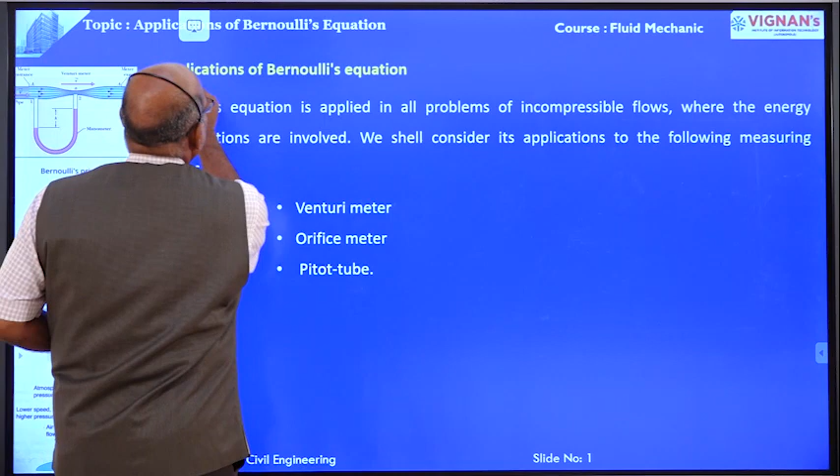Today we are going to discuss applications of Bernoulli's equation. What is Bernoulli's equation? That we have already discussed earlier. Bernoulli's equation is applied in all problems of incompressible flows where energy considerations are involved.

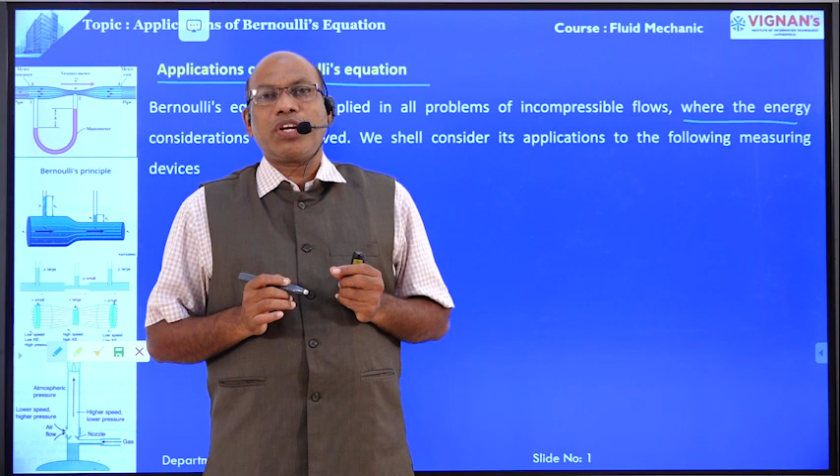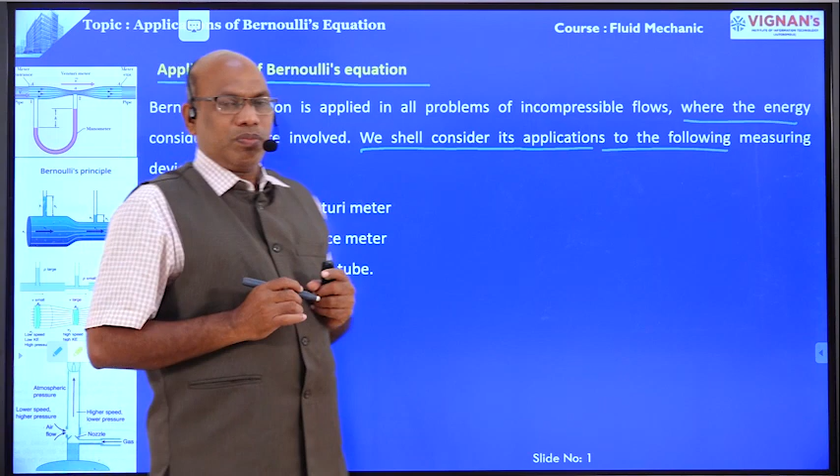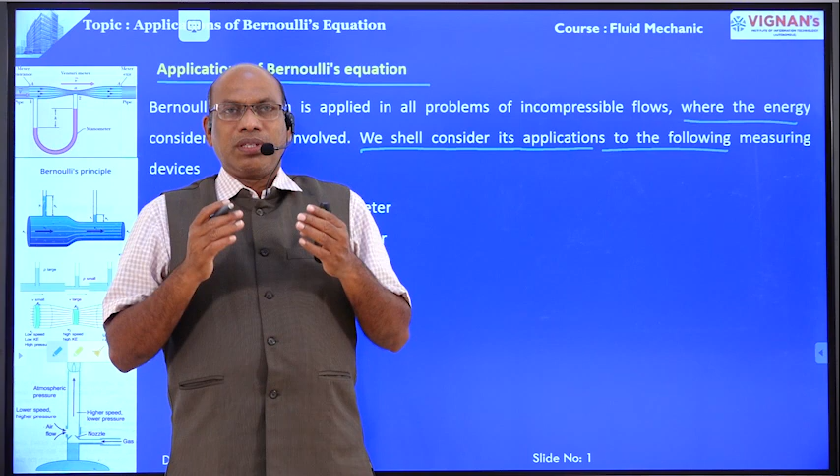Now we shall consider its applications to the following measuring devices. What are the devices? One is the venturimeter, then the orifice meter, and the pitot tube. Venturimeter is a device used to measure the flow rate in pipes. Another one is the orifice meter, which is also a device used to measure the flow rate in pipes.

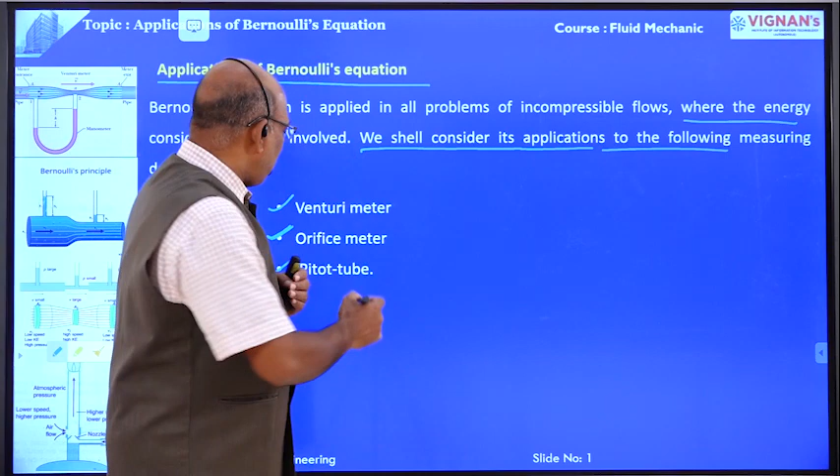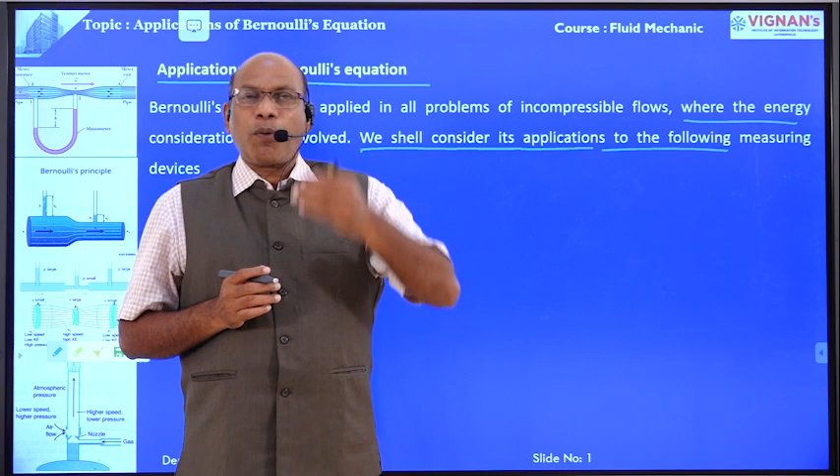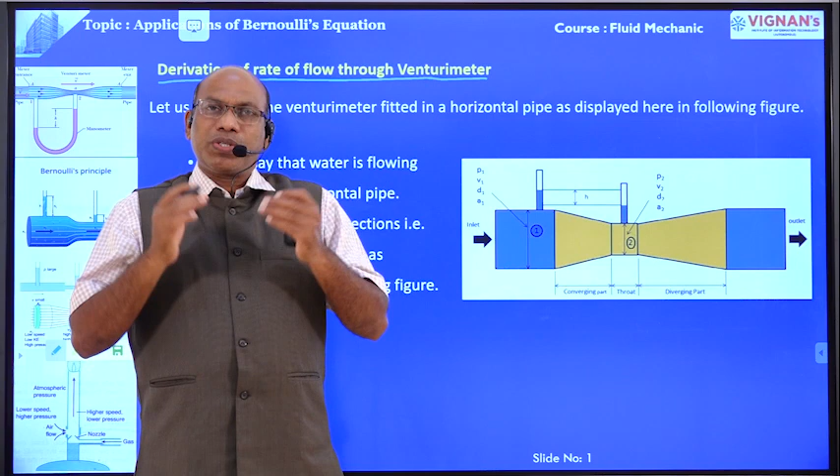That means venturimeter and orifice meter are the equipment used to measure the flow rate in pipes. And the last device is the pitot tube. Pitot tube is a device used to measure the velocity of flow at a point in channels as well as in pipes. These three devices we are going to discuss one by one. First we discuss the venturimeter, the derivation of rate of flow through a venturimeter.

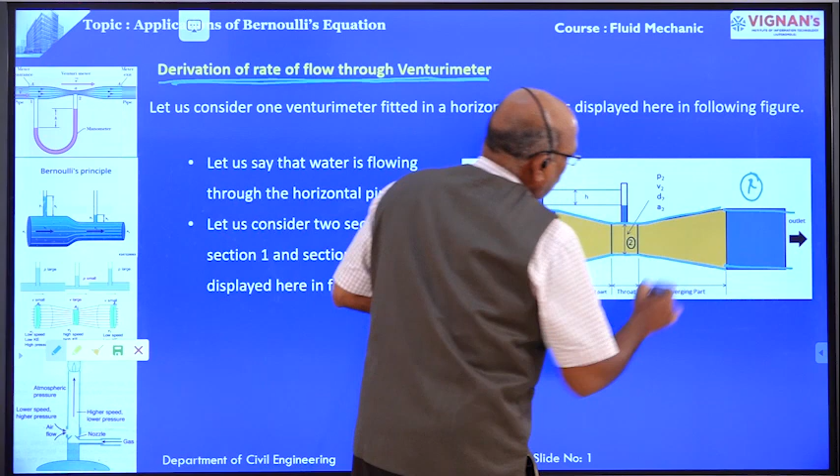Now we are going to take one diagram here. This is the pipe flow. The pipe is carrying water from left to right. Here we are going to provide one device, that is the venturimeter. The venturimeter has three components: the convergent part, the throat, and the divergent part. And water is flowing from left to right.

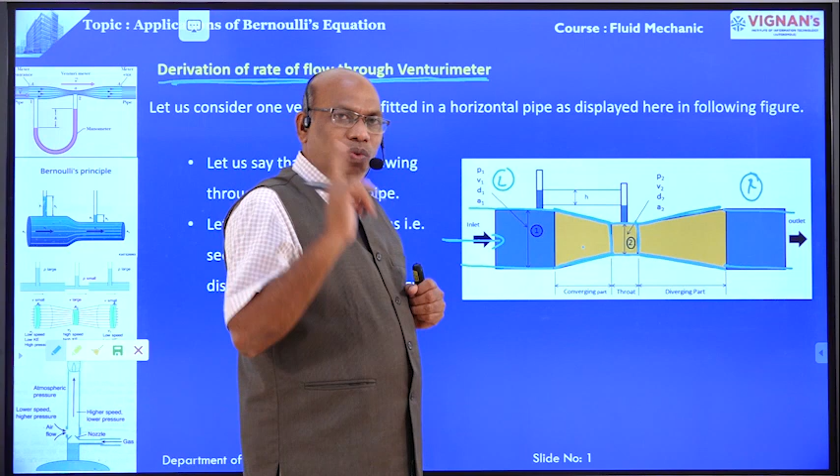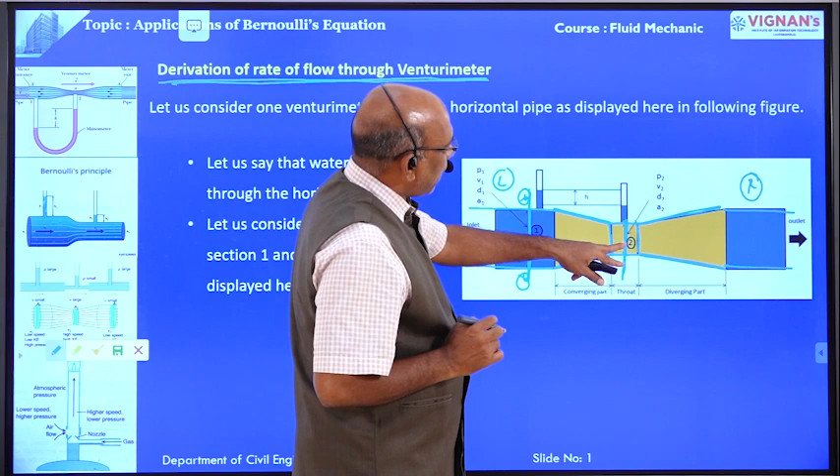In this diagram we are going to take two sections, section 1-1 and section 2-2. Section 1-1 is taken over the pipeline before the venturimeter. Section 2-2 is taken at the throat section. Now we install one piezometer in the pipe. Because of the pressure in the pipe, the liquid automatically rises up to this level. One more piezometer is installed at the throat section, and because of the pressure here, the water also rises like this.

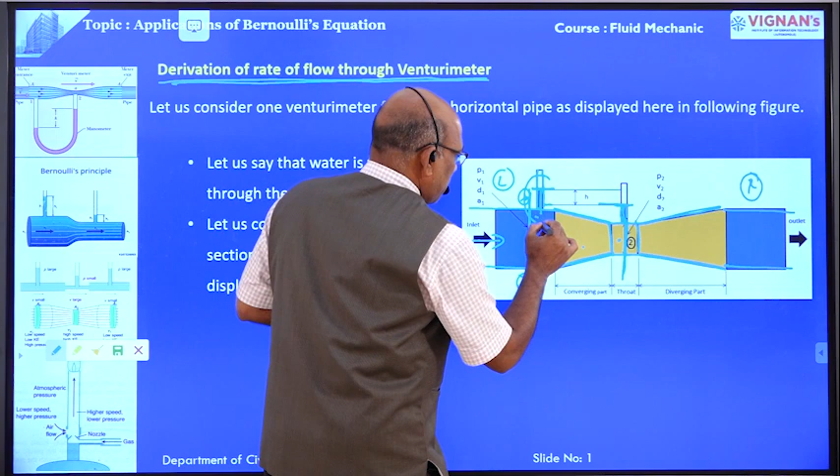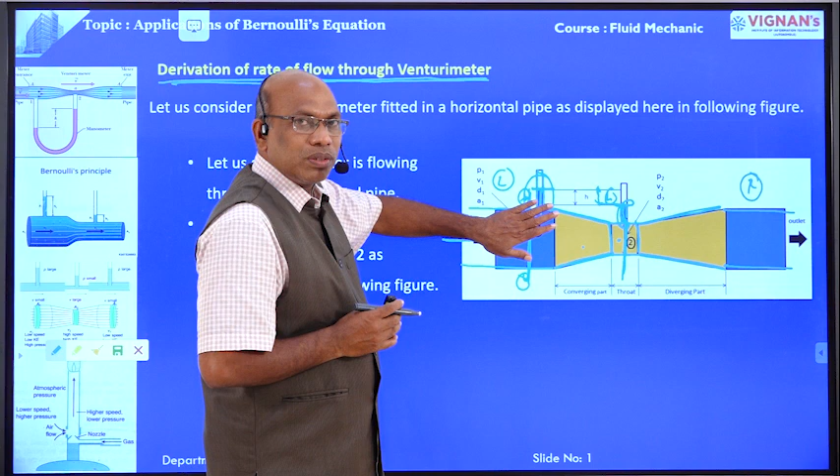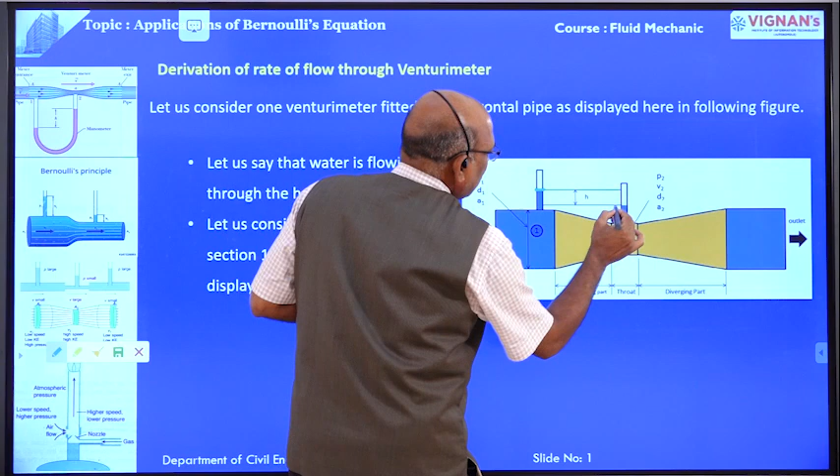There is a head level difference between the piezometer level at the pipe and the piezometer level at the throat. That head level difference is H. What is happening? In the pipe, the cross-sectional area is more compared with the throat, so the pressure head is more. Here the cross-sectional area is less, so the velocity head is more. At the pipe this is the pressure head, at the throat this is the pressure head, and the level difference between these two is H.

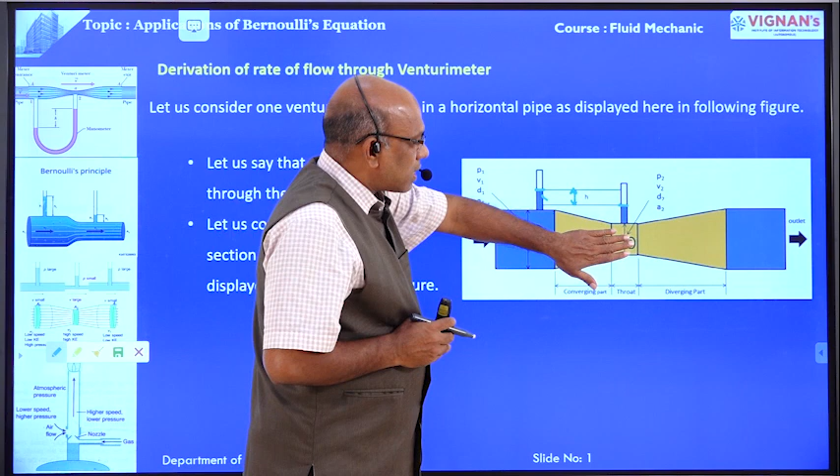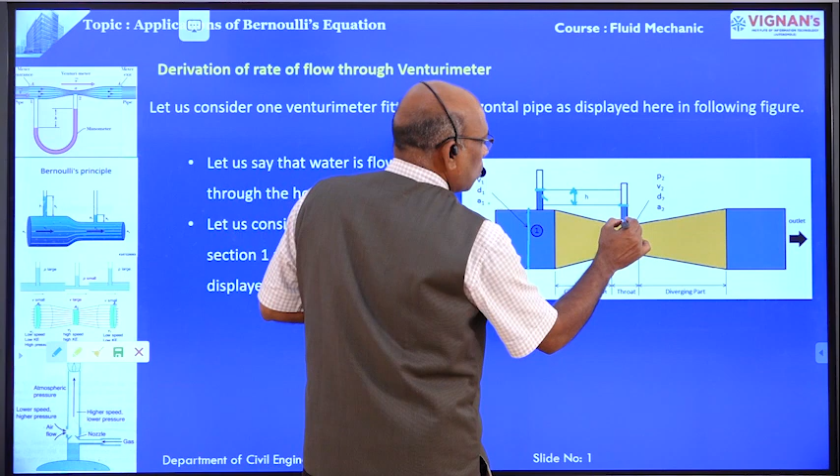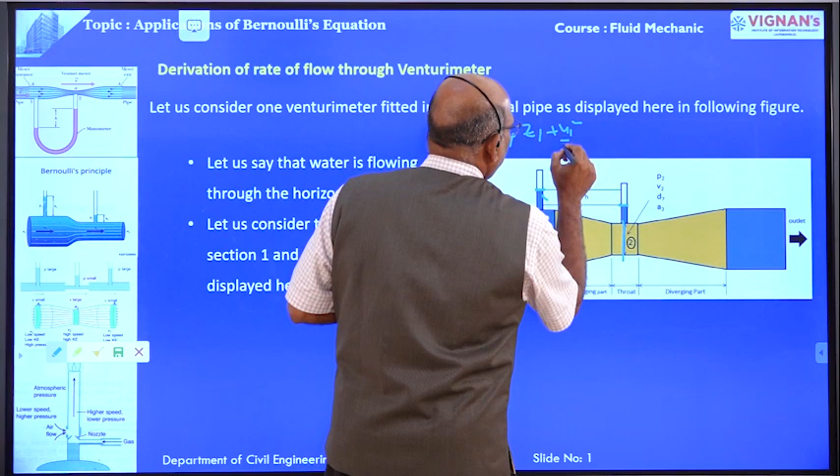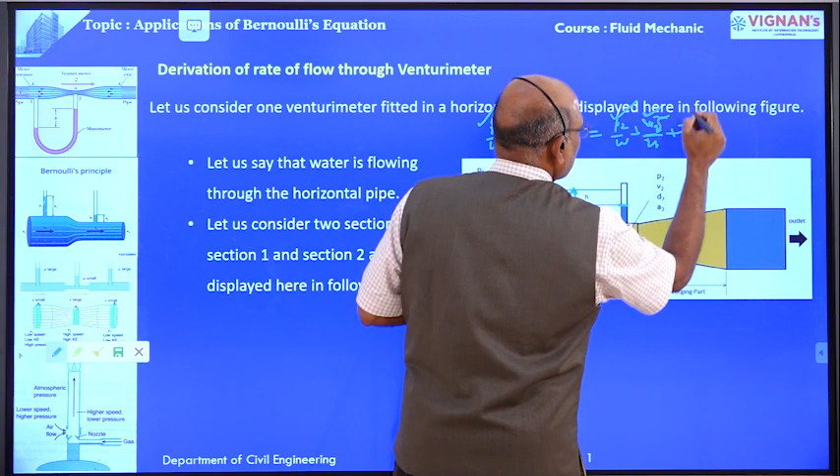Because the cross-sectional area is more, velocity is less, and automatically pressure head is more. Here the cross-sectional area is less, pressure head is less, and velocity is more. This is based on Bernoulli's equation. What is Bernoulli's equation? Pressure head plus velocity head plus datum head at section 1-1 must be equal to pressure head plus velocity head plus datum head at section 2-2. That is, P1 by W plus Z1 plus V1 square by 2g at section 1-1 is equal to P2 by W plus V2 square by 2g plus Z2 at section 2-2: pressure head, velocity head, and datum head. This is the Bernoulli equation.

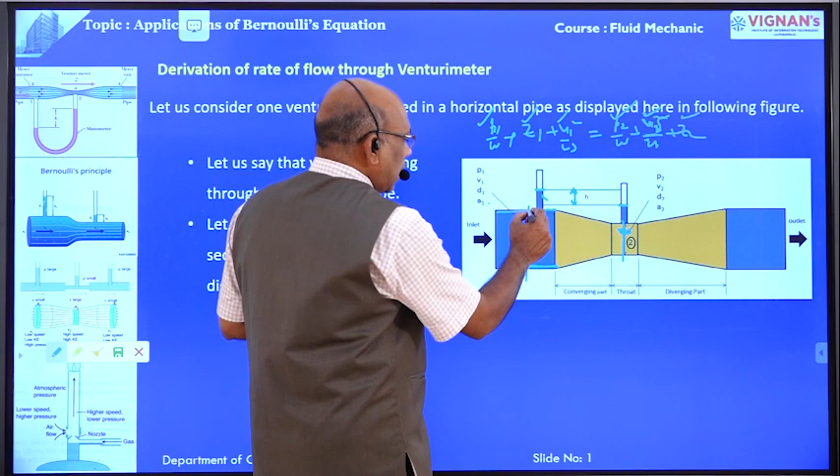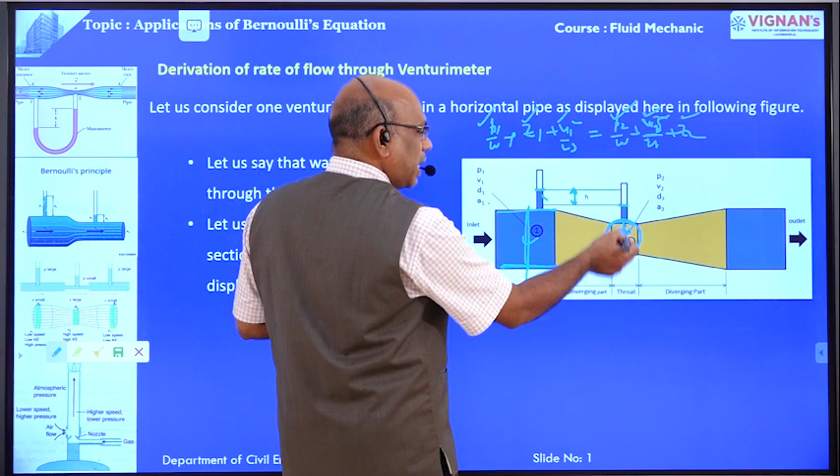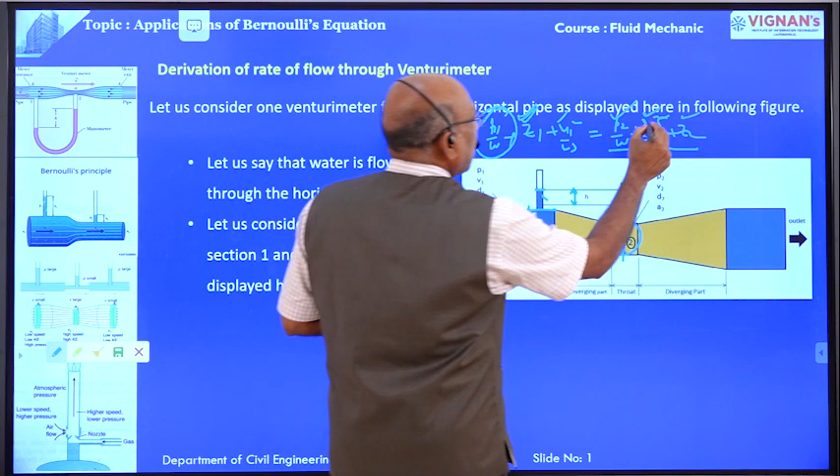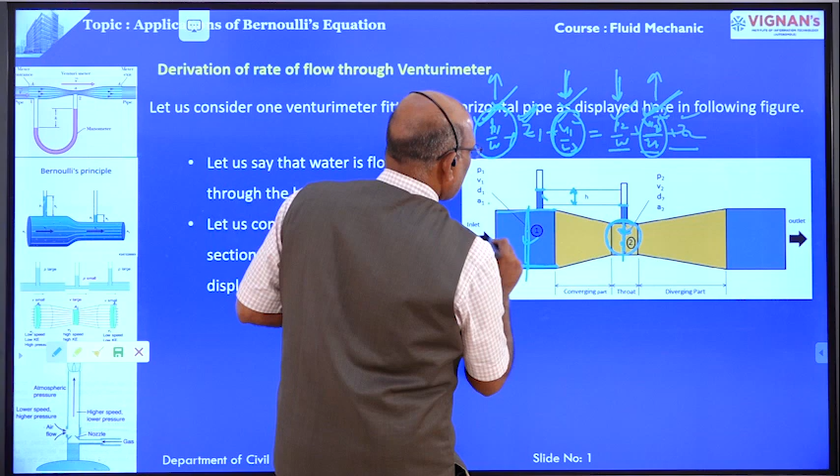Now, the cross-sectional area at section 1-1 is more, so velocity is less compared with section 2-2. At section 2-2 the cross-sectional area is less, which means velocity head is more, and definitely pressure head should be less. The sum of pressure head, velocity head and datum head must be equal at both sections. So the pressure head is more at section 1-1, and the velocity head is more at section 2-2, where the pressure head is less. Because this is a horizontal pipe, the datum head at section 1-1 is equal to that at section 2-2, Z1 equals Z2, and these two cancel.

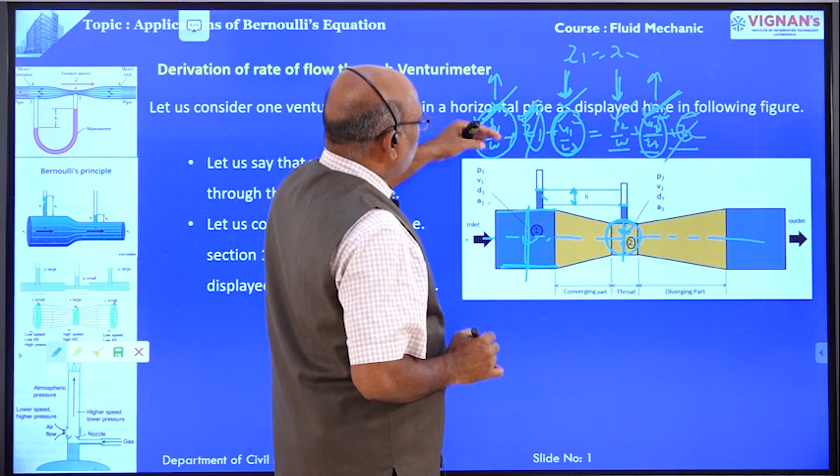When pressure head increases, velocity head decreases; when velocity head increases, pressure head decreases. This is the Bernoulli's equation. This is section 1-1, this is section 2-2. Section 1 is taken over the pipe, and section 2 is taken at the throat. At section 1-1, P1 is the pressure intensity, and V1 is the velocity of flow.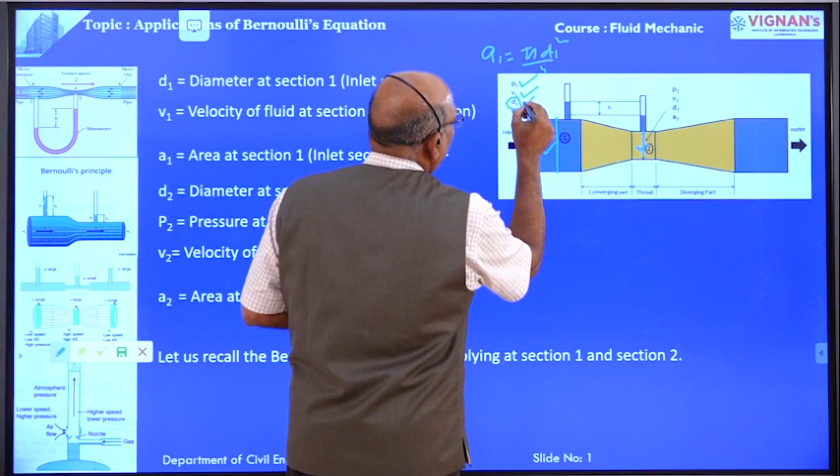D1 is the diameter of the pipe at section 1-1. A1 is the cross-sectional area of the pipe at section 1-1. Cross-sectional area A1 is equal to what is the formula? Pi D1 square by 4. D1 is the diameter at section 1-1. Therefore, A1 is equal to pi D1 square by 4.

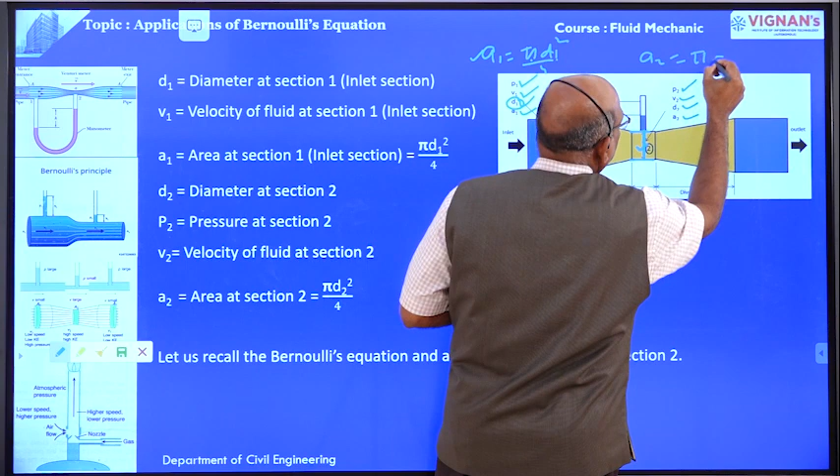Now, at section 2-2, P2 is the pressure intensity at section 2-2. V2 is the velocity of flow at section 2-2. And D2 is the diameter at section 2-2. A2 is the cross-sectional area of the throat. That is, A2 is equal to pi D2 square by 4. D2 is the diameter of the throat. Right? These are the terms used in this diagram.

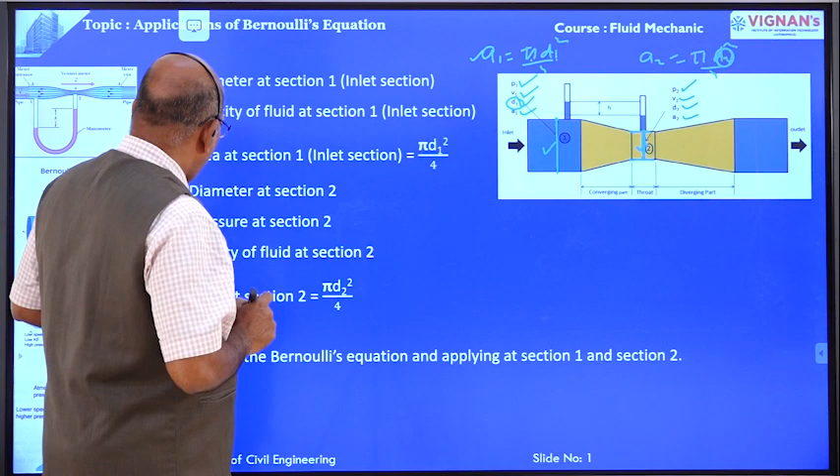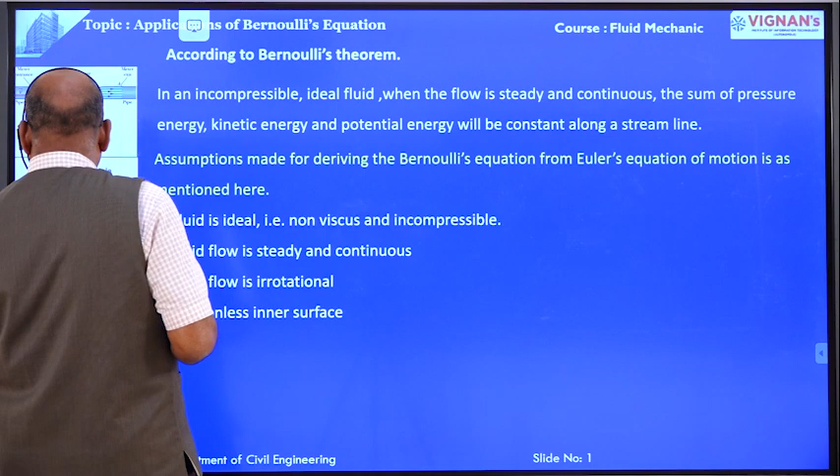Already I have explained about the Bernoulli equation. Now we are going to apply the Bernoulli equation. What is the Bernoulli equation? Just now I have explained to you. For an incompressible ideal fluid, when the flow is steady and continuous, the sum of pressure head plus velocity head plus datum head at one section must be equal to pressure head plus velocity head plus datum head at another section. Right? This is the Bernoulli equation.

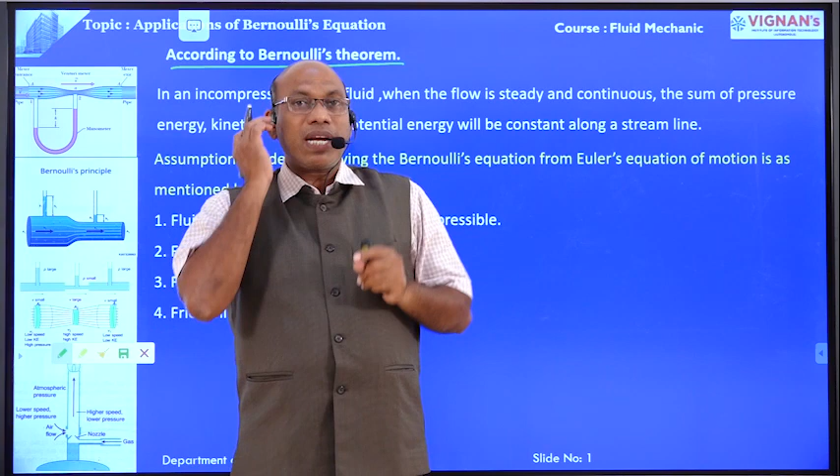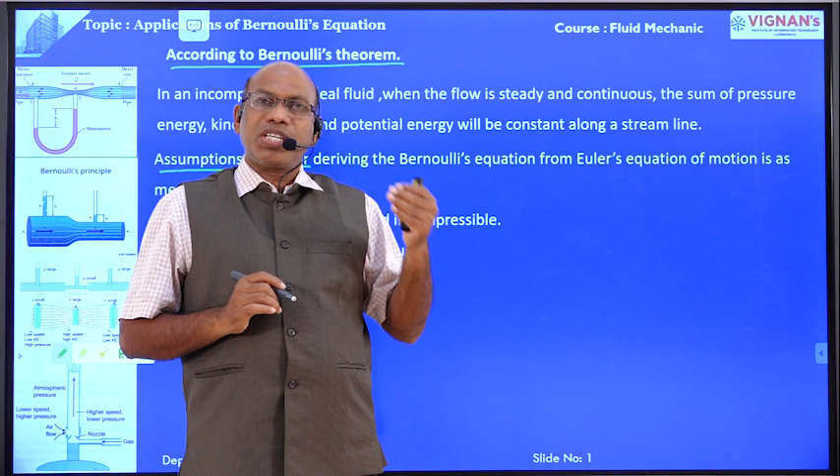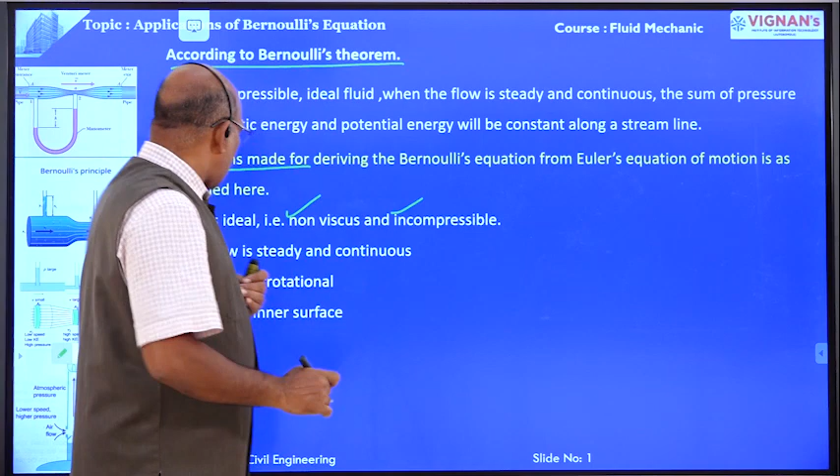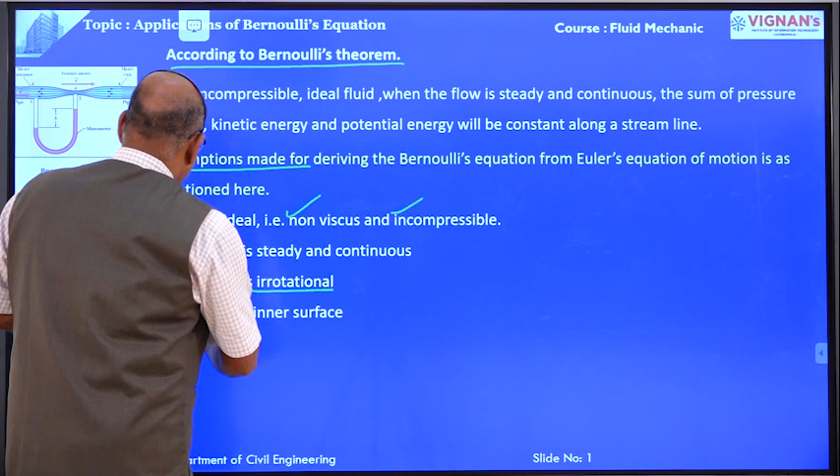Now, assumptions. Already I have explained the assumptions made in the derivation of the Bernoulli equation. That Bernoulli equation is derived from the Euler's equation of motion. Now, what are the assumptions we have used? Once again I am going to recall them. First, the fluid is ideal, non-viscous and incompressible. Another assumption is fluid flow is steady and continuous. Next, fluid flow is irrotational. And another assumption, frictionless inner surfaces. These are the assumptions used in the derivation of the Bernoulli equation.

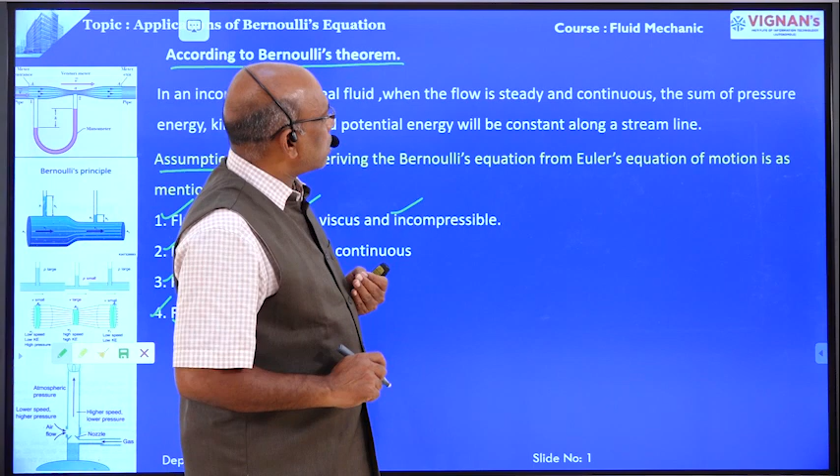That Bernoulli equation also we have derived from the Euler's equation of motion. Apply Bernoulli equation at section 1-1 and section 2-2. Right? This is section 1-1 of the pipe. This is section 2-2 at the throat section. At section 1-1, pressure head plus velocity head plus datum head must be equal to pressure head plus velocity head plus datum head at section 2-2. This is the Bernoulli equation. Here, P1 by rho g is the pressure head at section 1-1. V1 square by 2g is the velocity head at section 1-1, plus Z1 is the datum head at section 1-1.

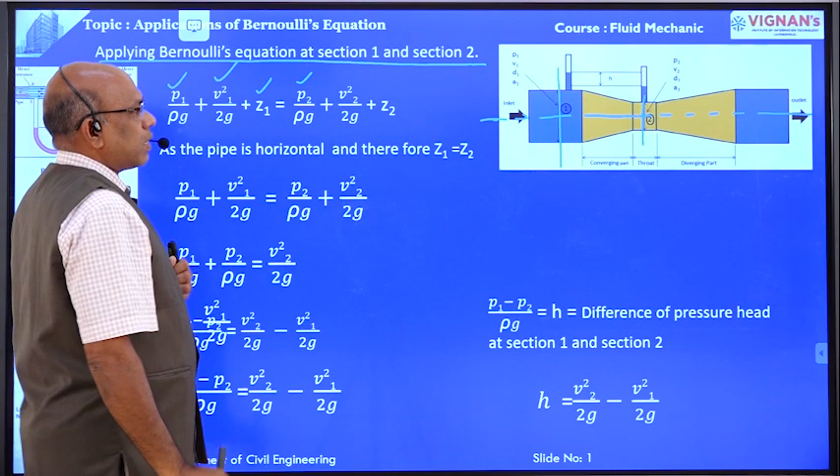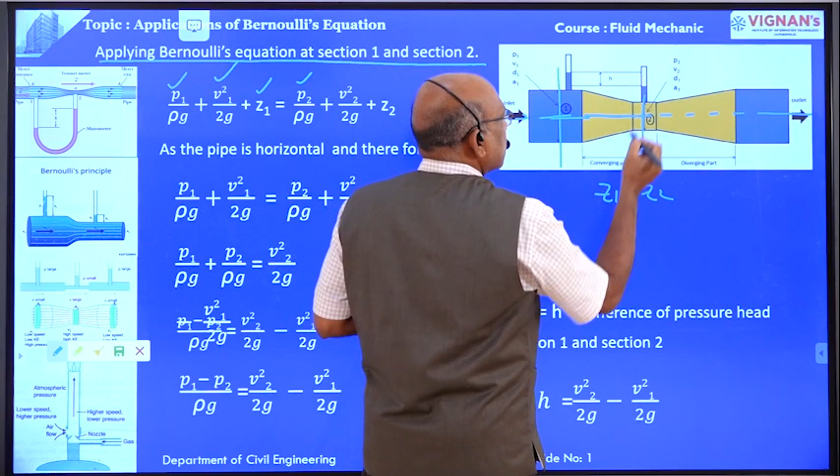Okay. This is the direction of flow. This is the center line of the pipe. Right? That is equal to P2 by rho g, the pressure head at section 2-2, V2 square by 2g, the velocity head at section 2-2, and Z2, the datum head at section 2-2. But here the pipe is horizontal, therefore Z1 is equal to Z2. Datum head at section 1-1 is equal to datum head at section 2-2. Here these two terms are neglected. Therefore P1 by rho g plus V1 square by 2g is equal to P2 by rho g plus V2 square by 2g. This is Bernoulli's equation if Z1 is equal to Z2.

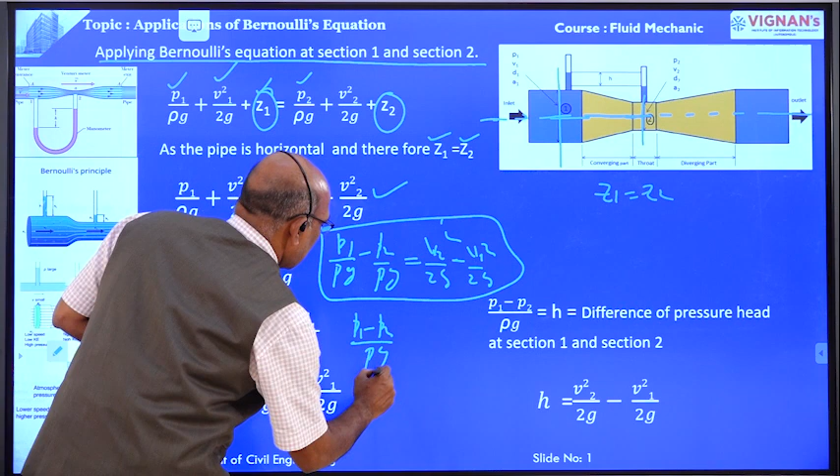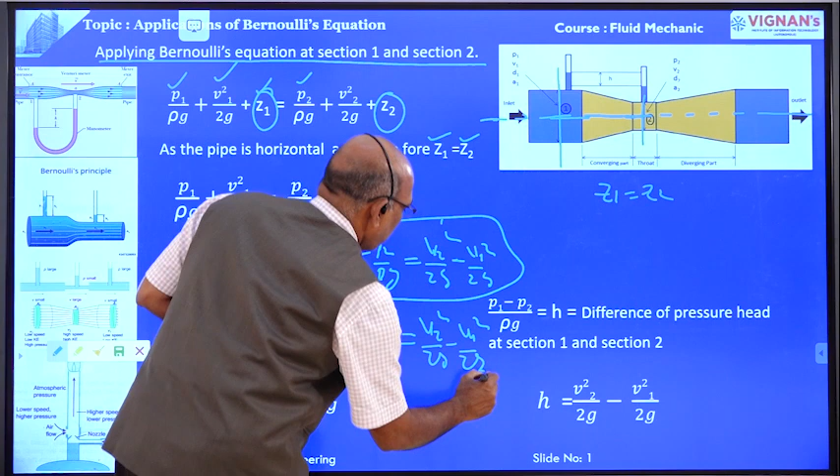Now from this equation, P1 by rho g, moving this to this side, minus P2 by rho g is equal to V2 square by 2g, moving that to that side, minus V1 square by 2g. This is the relation. P1 by rho g minus P2 by rho g is equal to V2 square by 2g minus V1 square by 2g. Now, P1 minus P2 divided by rho g is equal to V2 square by 2g minus V1 square by 2g. This is the equation we have.

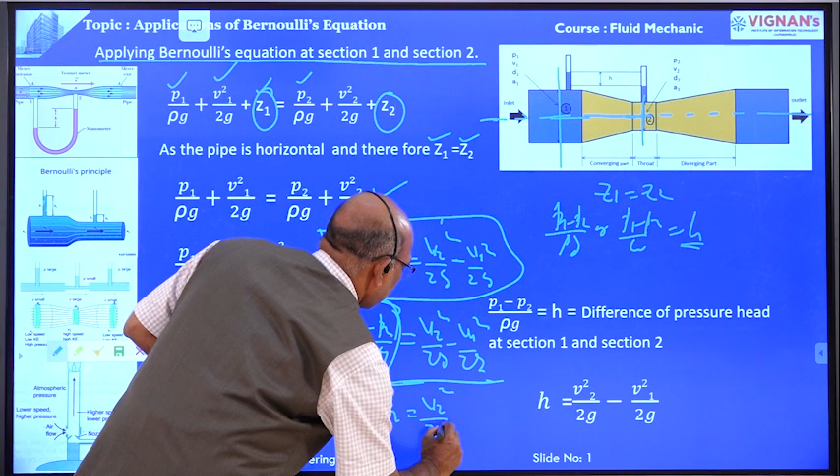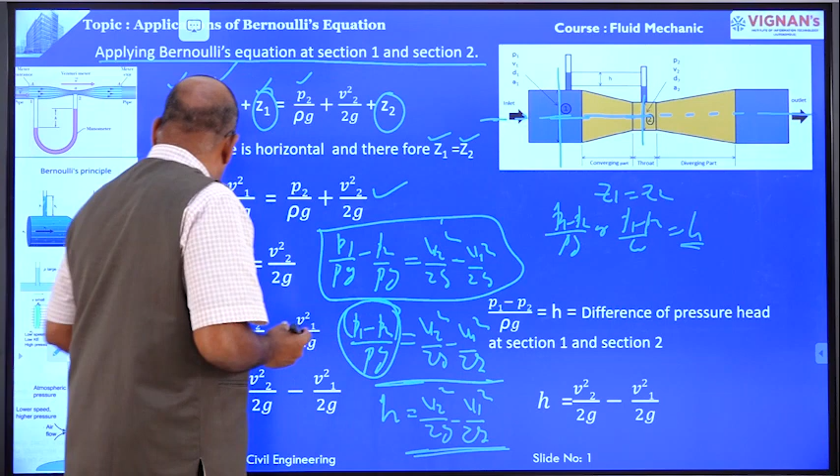But we know the pressure head difference between section 1-1 and section 2-2 is H. That means P1 minus P2 divided by rho g, or P1 minus P2 divided by w, is equal to H. H is the pressure head difference between section 1-1 and section 2-2. Therefore, in place of P1 minus P2 divided by rho g, we are going to take H. H is equal to V2 square by 2g minus V1 square by 2g. This is the equation we have. H is equal to V2 square by 2g minus V1 square by 2g.

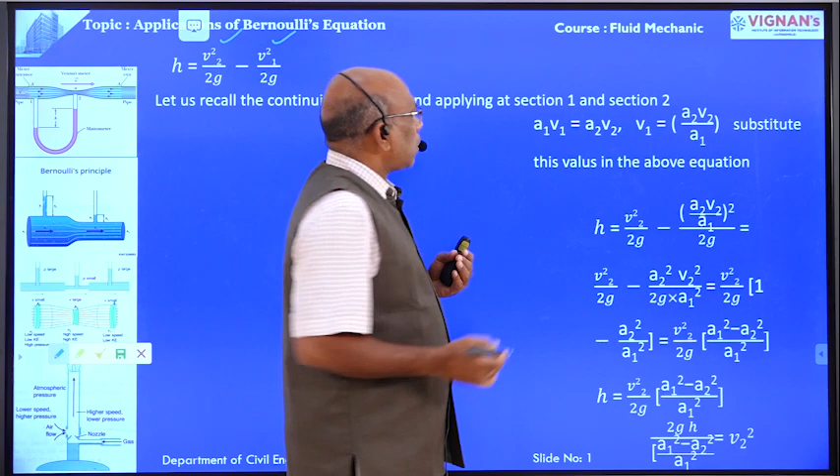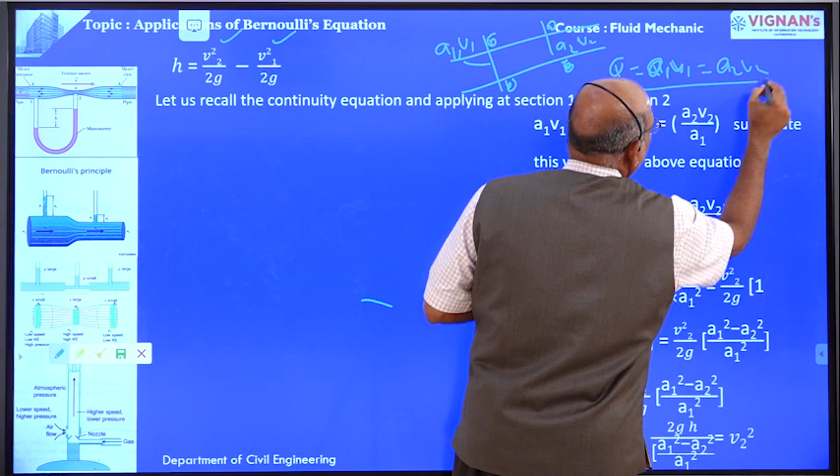Now we are going to once recall the continuity equation. Continuity equation means Q is equal to A1 V1 is equal to A2 V2. That is the continuity equation. Suppose this is one pipe, this is section 1-1, this is section 2-2. The cross-sectional area at section 1 is A1, velocity at section 1 is V1. Cross-sectional area at section 2 is A2, velocity at section 2 is V2. As per the continuity equation, Q is equal to A1 V1 is equal to A2 V2. Already I have explained about the continuity equation. This is the continuity equation. From this equation, A1 V1 is equal to A2 V2. A1 means the cross-sectional area of the pipe at section 1-1.

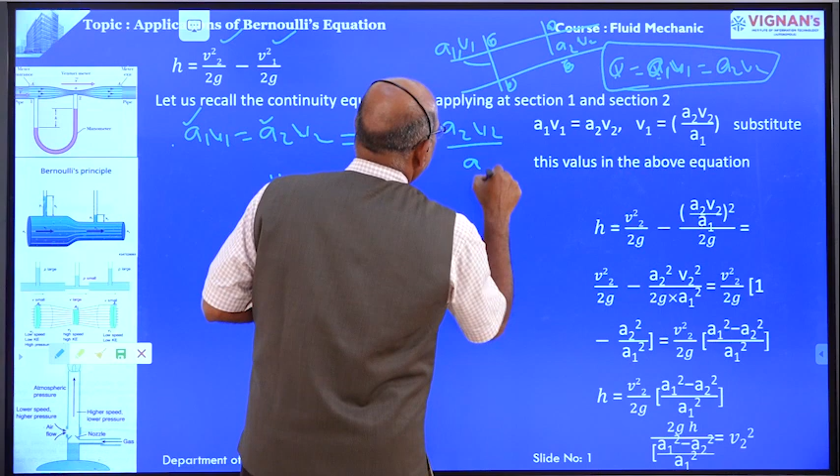V1 means velocity of flow at section 1. A2 means cross sectional area of the throat or at section 2. V2 is the velocity of flow at section 2 or the throat. Right? From this equation, V1 is equal to A2 V2 divided by A1. Are you clear? V1 is equal to A2 V2 divided by A1.

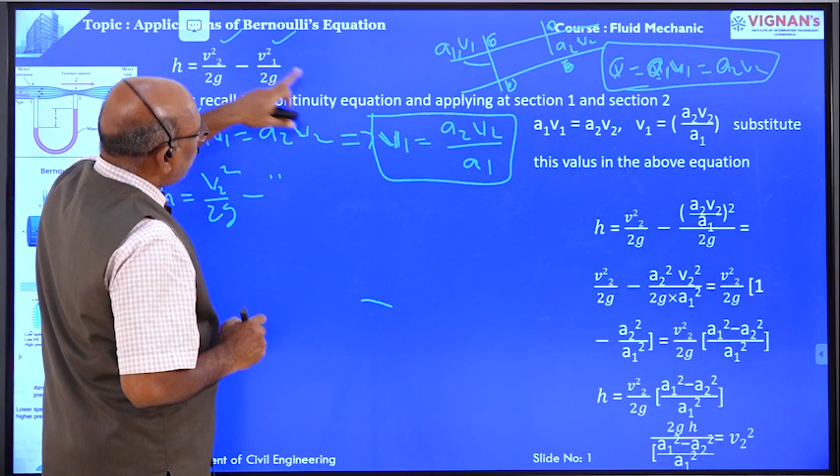Now, in the above equation, in place of V1, we are going to take A2 V2 divided by A1. Therefore, H, the pressure difference between section 1 and section 2, is equal to V2 square by 2g minus, in place of V1, we take this value, that is (A2 V2 divided by A1) square divided by 2g. This is equal to V2 square by 2g minus A2 square V2 square divided by A1 square into 2g.

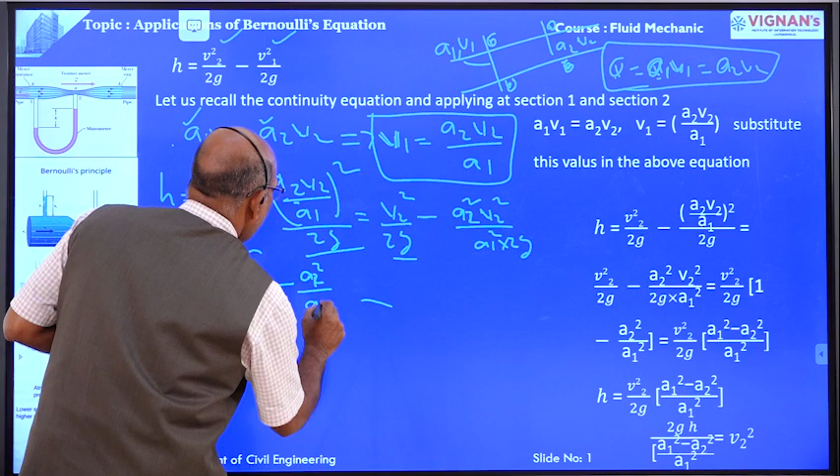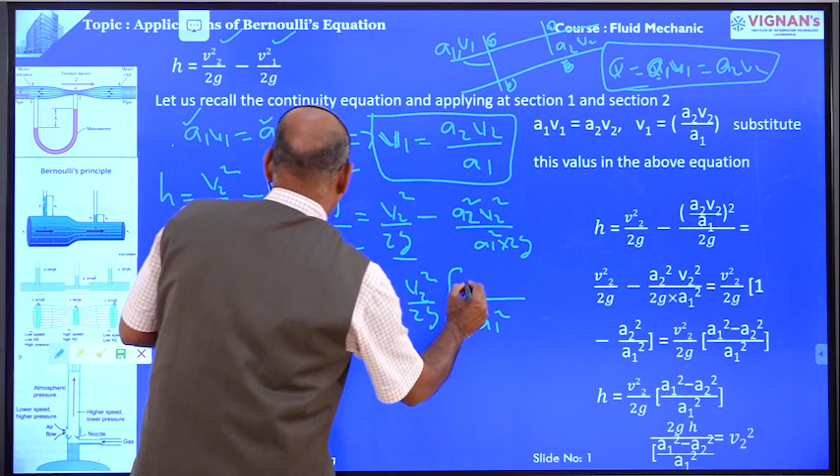Now we are going to take V2 square by 2g as common. Then 1 minus A2 square divided by A1 square. This is the equation we have. Then this is equal to V2 square by 2g into A1 square minus A2 square by A1 square. H is equal to V2 square by 2g in brackets A1 square minus A2 square by A1 square.

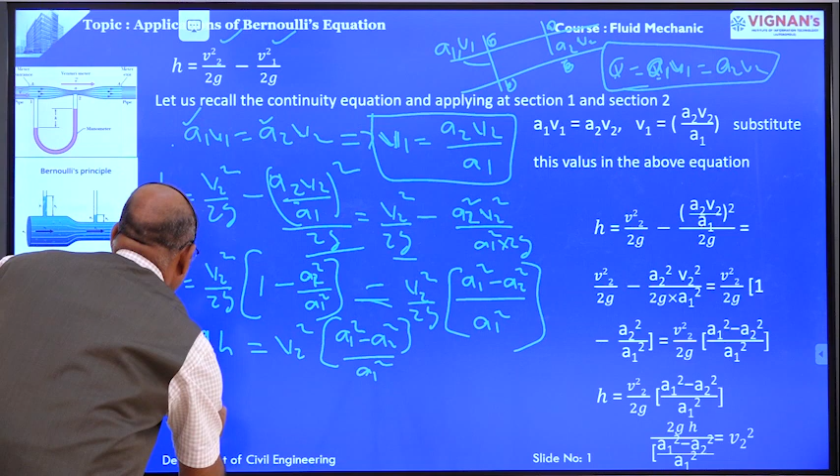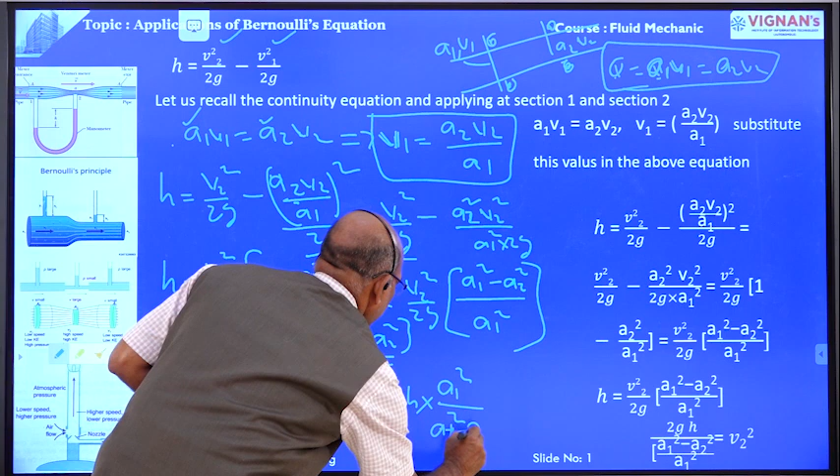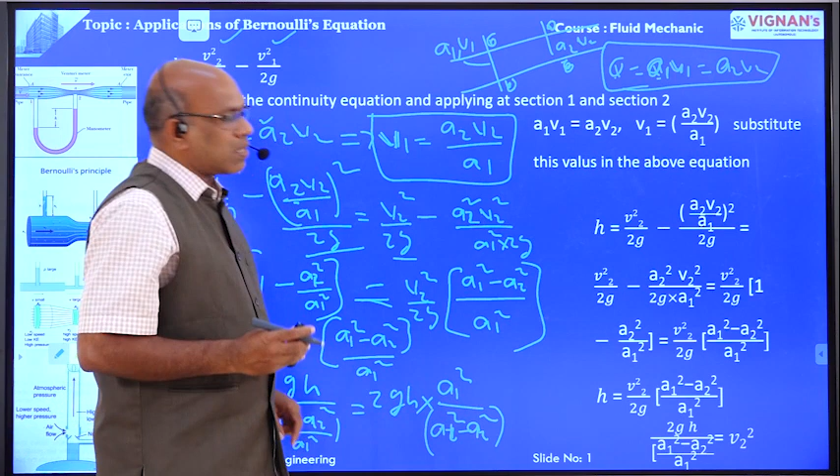Now 2gH is equal to V2 square into A1 square minus A2 square divided by A1 square. Now V2 square is equal to 2gH divided by A1 square minus A2 square divided by A1 square. This is equal to 2gH into A1 square divided by A1 square minus A2 square. Now V2 square is equal to 2gH A1 square divided by A1 square minus A2 square.

Now V2 is equal to square root of 2gH A1 square divided by A1 square minus A2 square. Therefore this is equal to A1 divided by root of A1 square minus A2 square into root 2gH. This is the relation we have. V2 is equal to A1 by square root of A1 square minus A2 square into root 2gH.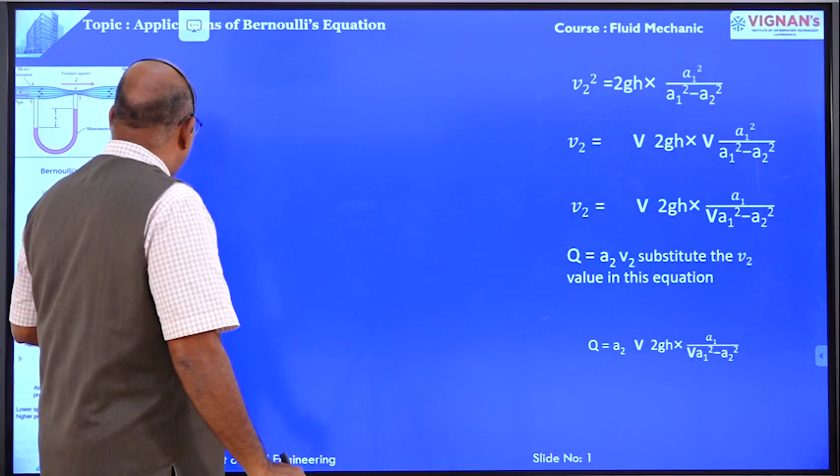Now we know one equation. We want to determine the discharge flowing through the pipe. For that purpose, Q is equal to A1 V1 or A2 V2. Already we have determined V2, therefore Q, the discharge from the pipe, is equal to A2 V2. Substituting V2, Q is equal to A1 A2 divided by square root of A1 square minus A2 square into root 2gH.

This equation we have derived with reference to the flow being incompressible and ideal. This equation is known as theoretical discharge, because it is derived with respect to an incompressible and ideal fluid. Therefore the actual discharge from the pipe is less than the theoretical discharge.

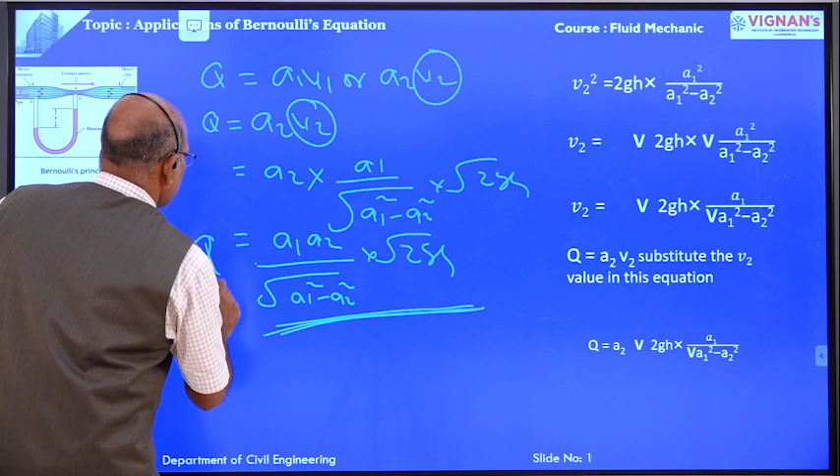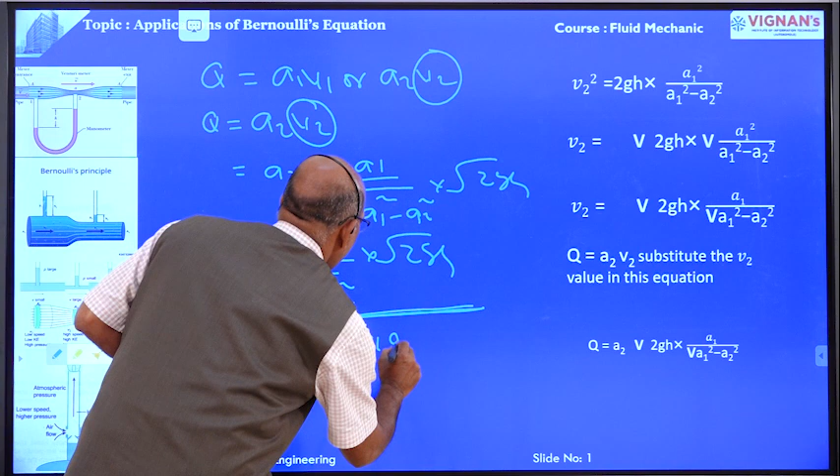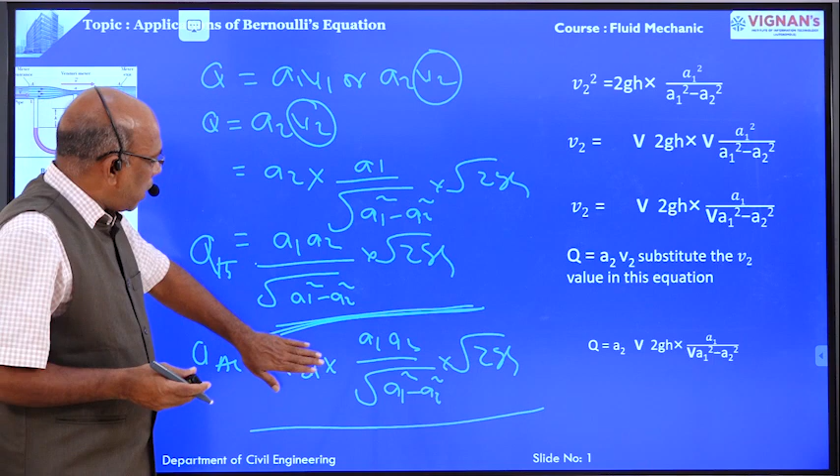Now we are going to introduce a coefficient, the venturimeter coefficient, here. Therefore this is the theoretical discharge, Q theoretical. Actual discharge, Q actual, is equal to CD into A1 A2 divided by square root of A1 square minus A2 square into root 2gH. This is the actual discharge.

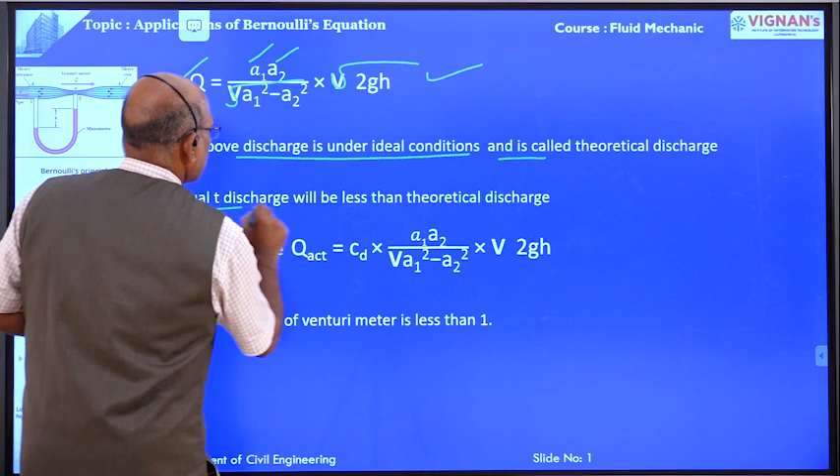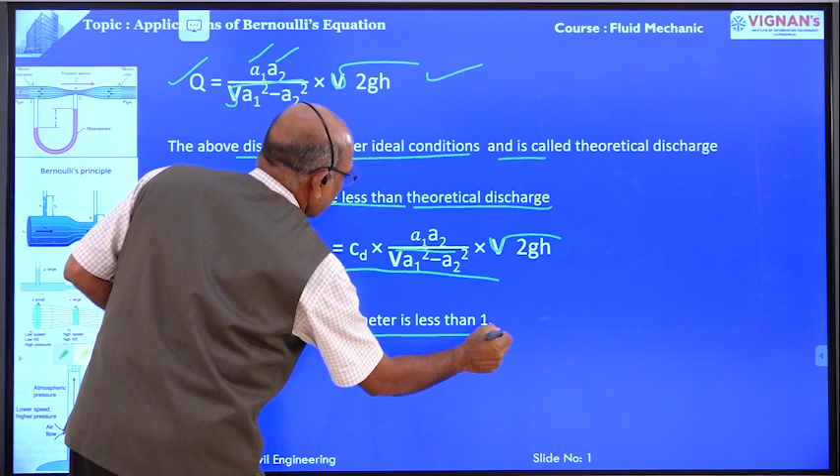Same equation here. Discharge Q is equal to A1 A2 divided by square root of A1 square minus A2 square into root 2gH. This is the theoretical discharge, the discharge under ideal conditions. Therefore actual discharge is less than the theoretical discharge. Q actual is equal to CD into A1 A2 divided by square root of A1 square minus A2 square into root 2gH, where CD is the coefficient of venturimeter. The CD value should be less than 1.

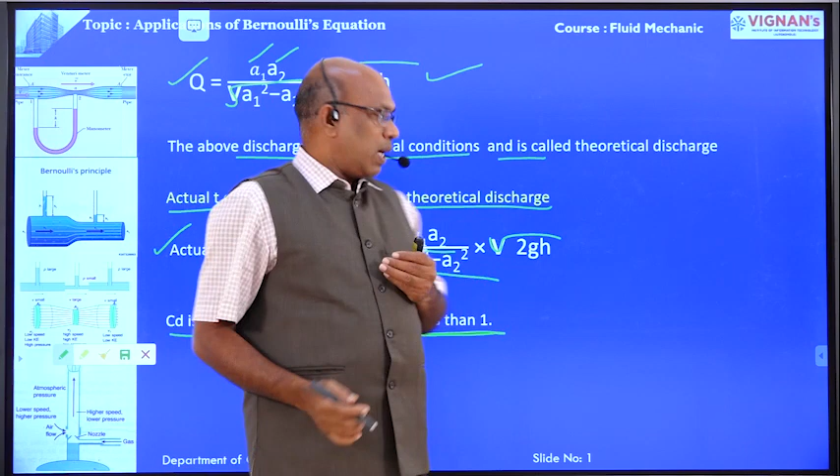The discharge through the venturimeter, Q actual, is equal to CD into A1 A2 divided by square root of A1 square minus A2 square into root 2gH. H is the pressure head difference between section 1 and section 2. A1 is the cross sectional area of the pipe. A2 is the cross sectional area at the throat. CD is the coefficient of venturimeter that should be less than 1.